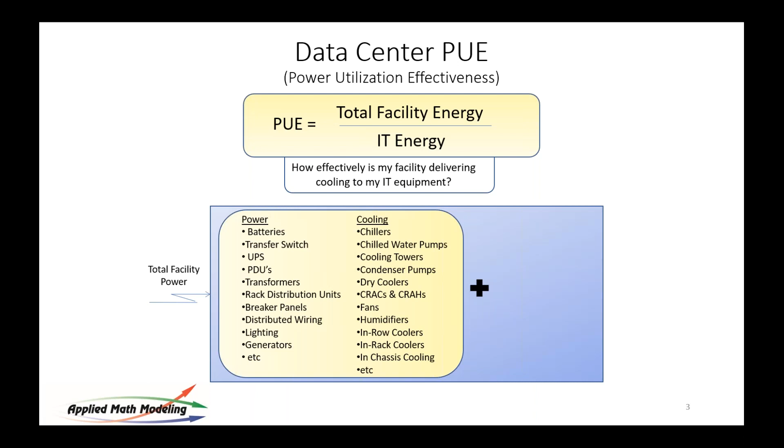Okay, so I want to do a level set first. The audience is fairly diverse here, so I'm going to back up and do a level set. PUE, I've done a lot of this before, I try not to be repetitive, so please bear with me. Power utilization effectiveness is total facility energy divided by IT energy. It was originally intended to represent how effectively the IT is being cooled, how effective the facility is at cooling that IT equipment. Total facility power is made up of all the power, including cooling plus IT. That's the numerator. The denominator is just IT power.

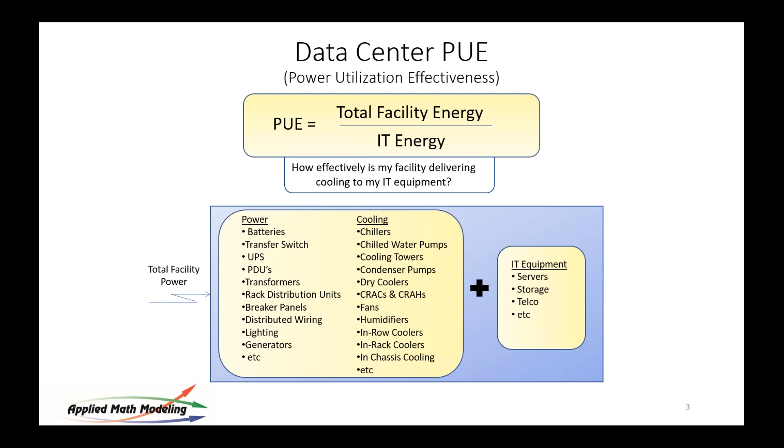But this particular metric has come under some criticism lately, and we think rightly so. Both Henry and I agree on this. PUE has some issues. For one, it's very difficult to measure, that is, the IT load itself doesn't stay constant, so trying to figure out what your IT load is difficult. You have to do this, by the way, for a whole year. PUE should be an annual number, not an instantaneous number.

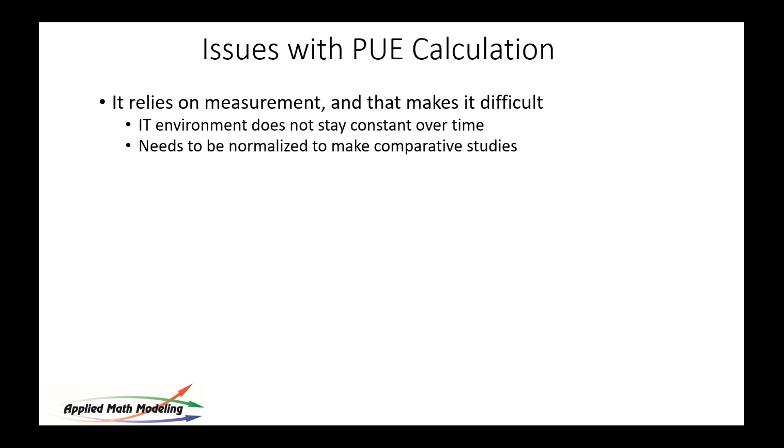Furthermore, it does not take into account environment. A data center in Alaska is not the same as a data center in Florida, even though they may be exactly the same with respect to mechanical load and everything else. The PUE number is going to be different. So why penalize the person in Florida for the person in Alaska? So that's part of it. It doesn't take into account environment, geography, as I mentioned.

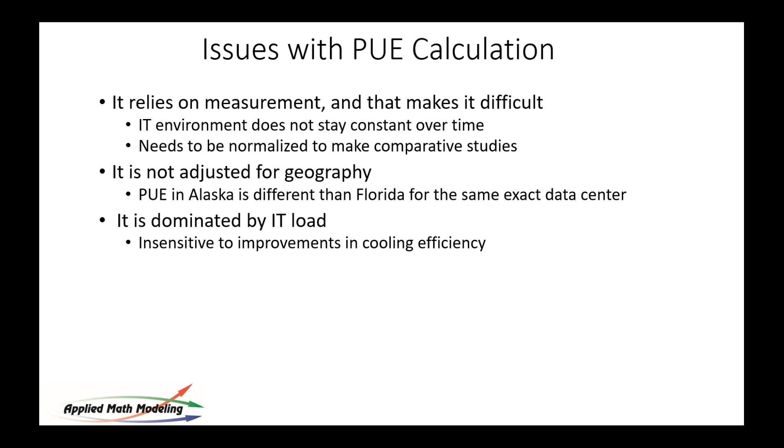It also is dominated by IT load. I mean, if your cooling system is very efficient, then this turns into a ratio of IT load to IT load, it's really dominated by that. So it's difficult to use it as a way to show improvements in cooling efficiency, and therefore it can be gamed. I think this is the biggest criticism of it.

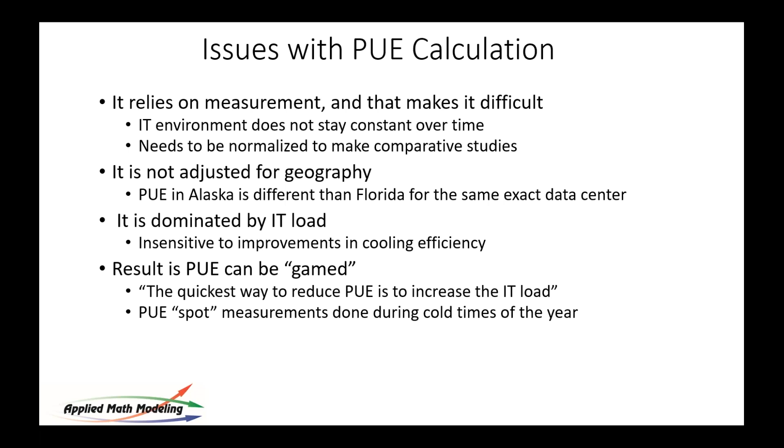I continue to go to these conferences and I hear people tell me that their PUE is 1.1, and I just scratch my head and think, what are we measuring? What does that mean? Where are we, is it Florida, is it in the North Pole? If it's the North Pole, just open the window, you've got a PUE of 1.0. So a lot of times these end up being spot measurements. There's no criteria really to it. The system for measuring it is poor. So it's not a great metric for indicating energy efficiency in a data center.

Now, ASHRAE has recognized this and been doing some work on this. And if you look at PUE, assuming your UPSs are efficient and everything else is efficient, which they're becoming more efficient, it really turns into cooling power. That's the dominant parameter in that numerator, cooling power.

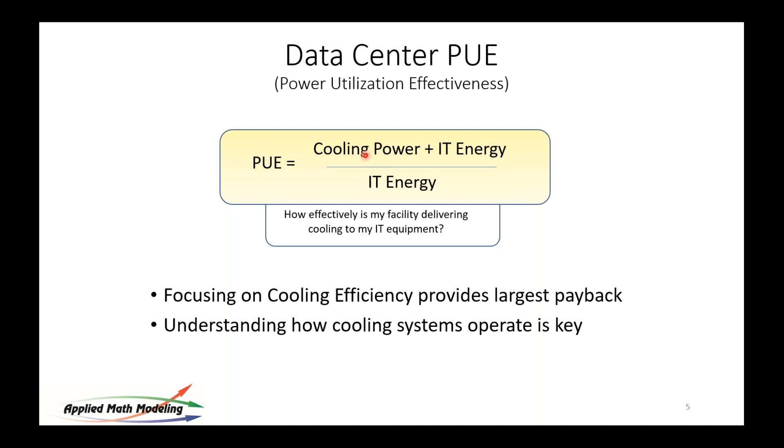And then you have IT energy and cooling energy. If you focus on the ratio of these two things, I've presented this in earlier webinars. That's exactly what ASHRAE 90.4 did. Now, they actually did an inverse of this - it's IT energy over cooling power, 1 over this. But nonetheless, it is a ratio of these two elements.

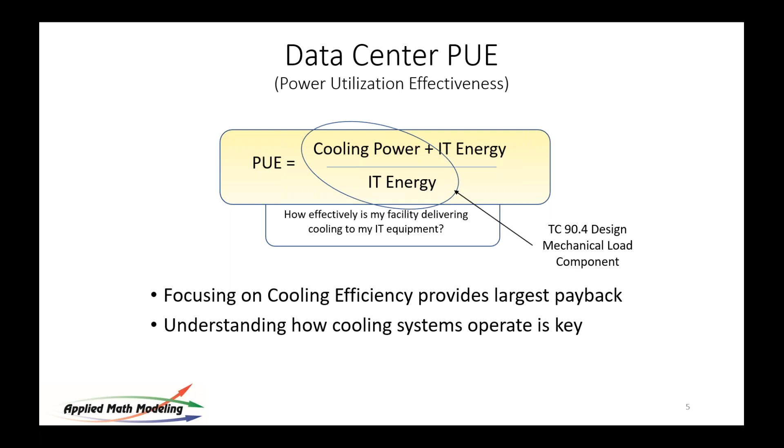And in 90.4, it's called a mechanical load component, and it is the ratio of these two parameters. This is very much like a chiller efficiency, which is typically measured in kilowatts per ton, a crazy series of numbers because they're not unitless. But it's the same idea, except for the entire system - the amount of energy we're using to cool the data center, including everything.

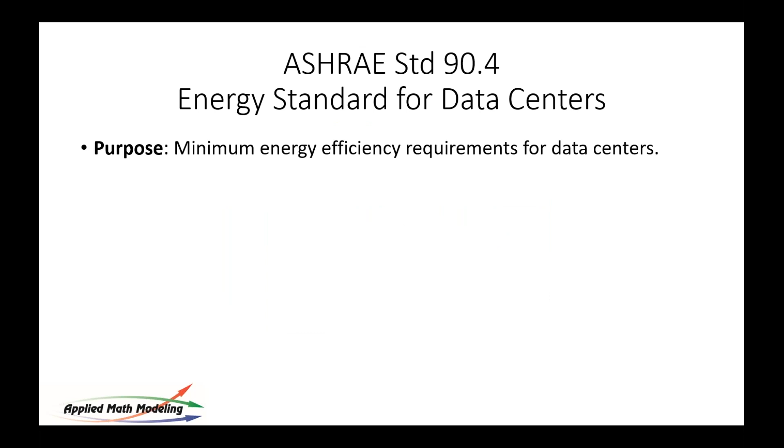So 90.4 is a minimum energy efficiency requirement for data centers. It applies to new data centers as well as existing data centers, and to modifications to data centers. It references 90.1 for all building envelope specifications. 90.4 was an extension to 90.1 because ASHRAE realized there were data centers in some of these buildings - how do you handle LEED certification on a building that's got a data center in it? That was the fundamental question.

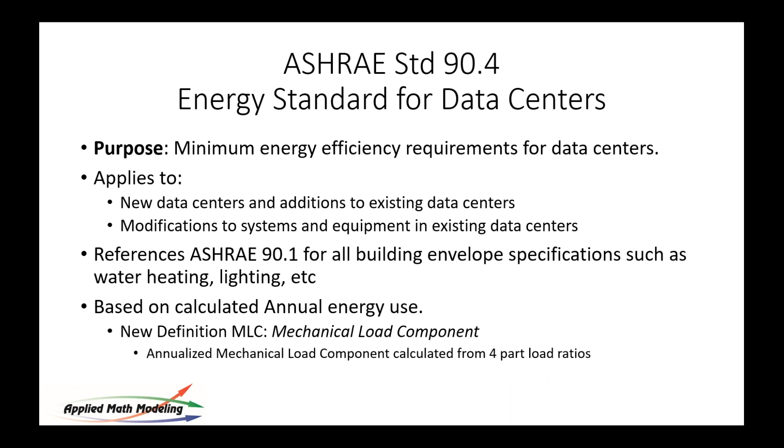It's based on annual use, and there's a new definition in 90.4 called mechanical load component. It's an annualized component calculated, in the most recent spec, in 4 sections based on 19 climate zones. It also has specific ITE criteria - that's the IT side - and they use 4 points.

They use mechanical power divided by IT power, effectively, at 4 different points. So this is really an inverse of COP - it's a COP number upside down. But the point is it's ratioing the mechanical power to cool compared to what it's trying to cool, the IT power, at 4 points.

The reason for the 4 points is to understand how that cooling system behaves at low IT loads. This is something that often happens: you design the cooling system for a data center to match worst case conditions, and then you never load it to worst case conditions, so it never runs right. The cooling efficiency is never high because everything is way off its design specification.

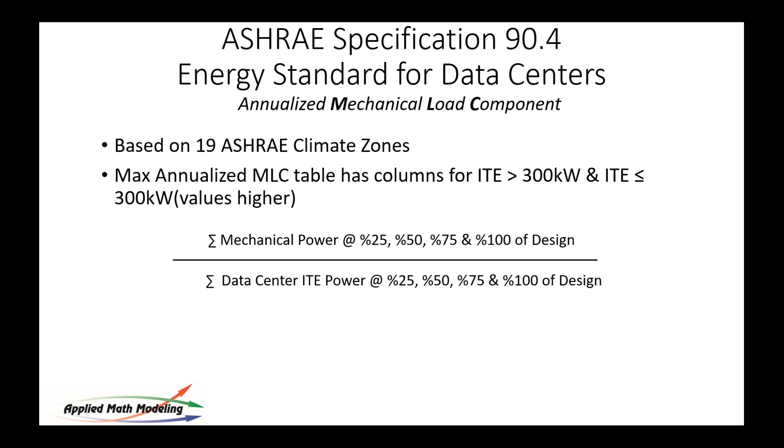So this was an attempt to put some better fundamentals and better metrics in place. Here the mechanical power is the sum of everything - it's really a systems level coefficient of performance kind of ratio. It includes cooling pumps, heat rejection fans, air handlers, etc. We think this makes a lot of sense, and now there's criteria that you can meet. It ends up being essentially the inverse of COP for the entire data center operation, which is a good thing.

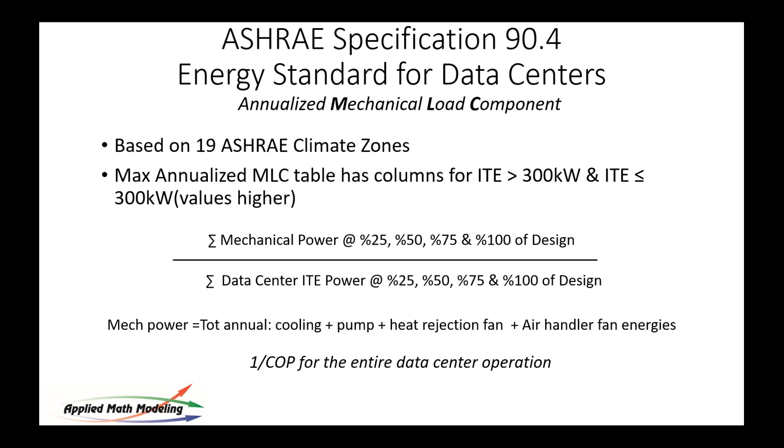So an opportunity for energy modeling now becomes apparent. Now that we have a standard specification set for this, the opportunity to create an energy model for the entire data center exists. This is something I've wanted to do for quite some time. We've added, as you probably know if you're a CoolSim user, energy metrics, but up until this point you had to do hand calcs to do it. But now that we have this, you can do modeling.

You can actually model the cooling system and measure its performance against the criteria set by ASHRAE, geographically based on climate zone. And you can develop system level models for each of the components, which is what we've been working on. Efficiency adjustments for things like fans, chillers, pumps, cooling towers - all of these have an empirical curve of energy efficiency that is a function of load.

The analogy I'll use here is your automobile. The engine runs most efficiently at a certain RPM. The transmission is a way to get you to that RPM - that's why they have a transmission. It doesn't work well at low RPM or high RPM; it's made for something right in the middle. You'll even notice automobiles today are getting more gears, now up to 8, trying to keep that RPM constant. Same case here - whenever you move off the design center of a fan, chiller, pump, or cooling tower, energy efficiency will drop.

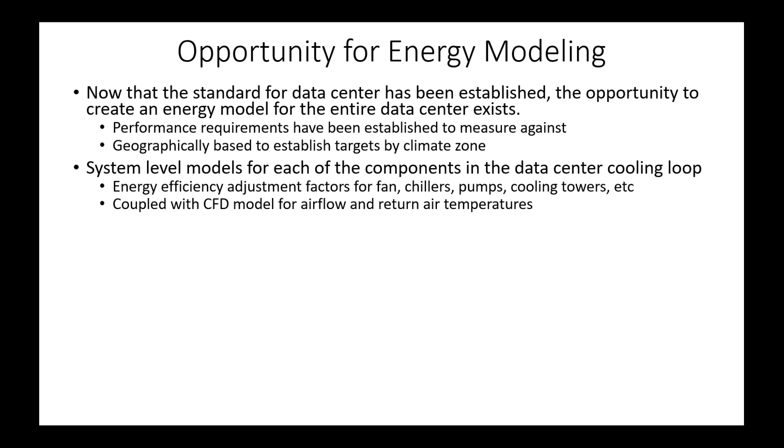Here, what we're doing is taking CFD output from CoolSim and feeding it to the energy model so that we have a coupled system that allows you to model the entire environment. This gives you a full tool for understanding how to improve the energy efficiency of the whole environment.

It'll even allow you to do things like change the location of the data center. What if we were to take a given data center and put it in Oregon versus Florida? Should we use an evaporative system versus an air-cooled chiller? These kinds of decisions can now be calculated, can now be modeled.

Things like changes in control strategies can be modeled. What if scenarios—what if I lose something? What if a chiller goes down? What if the second data center or the room that I'm putting on this plant is not going to come up for a period of time?

This helps you in the decision-making process because it allows you to understand the implications of those things. And also, I think this is going to become rather important: compliance. Is it compliant to 90.4? We see LEED certified becoming a fairly well-recognized moniker that people are encouraged to pursue.

We think this will be the same way. 90.4 will become something that data centers need to adhere to with respect to efficiency. And really the best way to know whether you've done that or not is to build a model of it and see if it does.

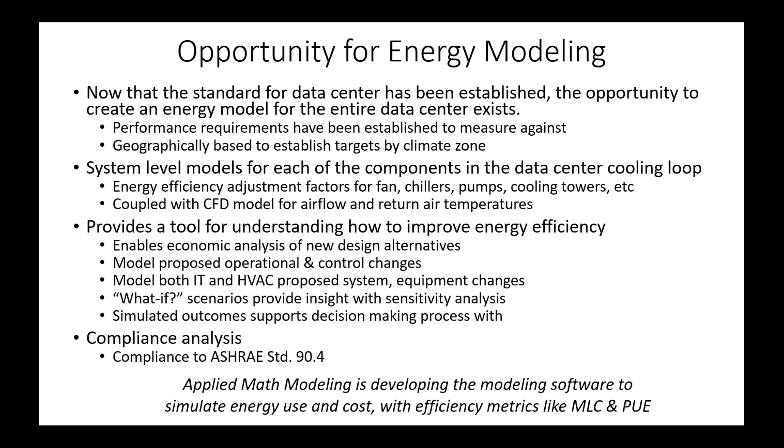So we're developing this modeling. Henry has certainly led this effort, been a big part of what we're doing here, and we will include these metrics in the output of the software. So what we're going to do today is walk through an example of how you would use this and how it ends up looking, and I'll show you some of the early work we're doing with the output coming out of the system.

The first thing we'll do—I've done this in many other webinars, so I'm not going to do it all here, I'm trying not to be redundant. If any of you want more details about how to do some of these things, just send me a note and I'll refer you back. I have recordings of all the webinars we've done in the past on our website, and this one will be recorded as well if you want to go over it again.

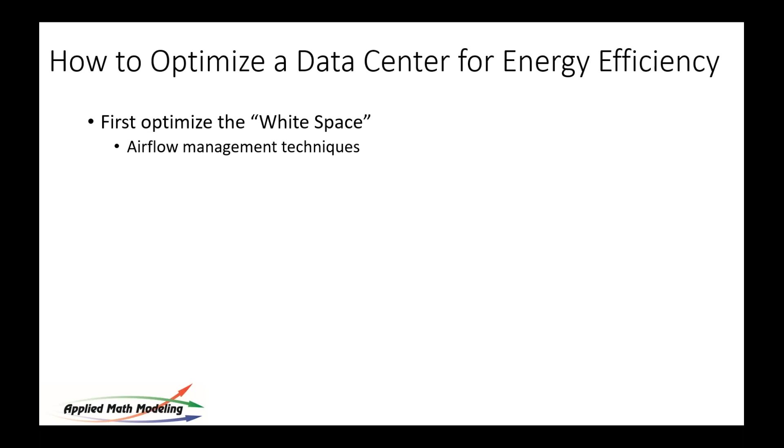So the first thing we need to do is optimize white space. This is generally airflow management techniques inside the data center itself. Then we optimize the mechanical system. We're not going to do a lot of this today in the interest of time, but there's a lot of opportunity. What Henry and I are finding as we go through examples is that the opportunity to optimize the mechanical system is fairly dominant. Right, Henry? We're seeing the mechanical side efficiencies can save a lot of money.

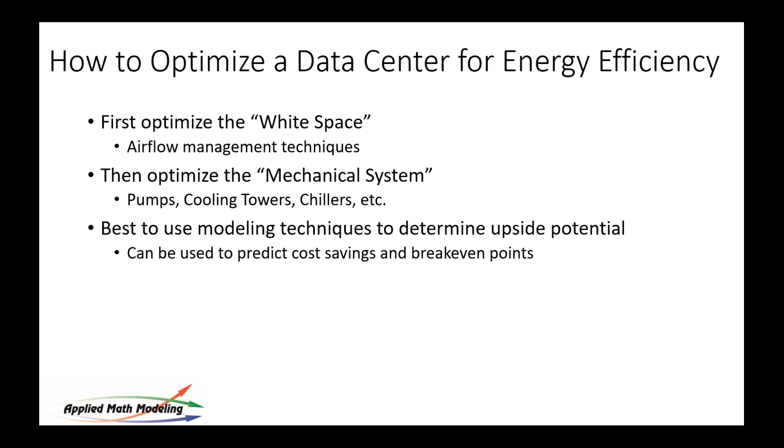So things like pumps, coolers, chillers—we use modeling techniques to determine what the upside potential is. For example, what's the simple break-even? What's the crossover point before you earn your money back? That's usually the one that drives it, although carbon reduction is becoming a big deal too. How much carbon can we reduce from doing these things? And we can predict that quite accurately.

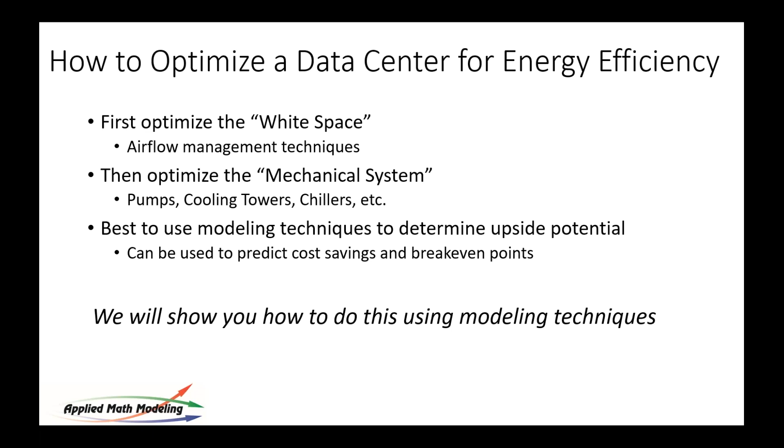So we're going to show you how to do this today with a very simple example. Again, today what we're trying to illustrate to you is primarily methodology—just show you what the sequence would be. Again, this has been reviewed earlier, so I don't want to belabor it.

First step is model the existing conditions with a baseline. Step 2, drop the total air supply by the air handlers to match the demands of the racks. For those of you who have been through DCEP training, this should be very natural to you. DCEP is data center energy practitioner training delivered by the Department of Energy.

This should be very obvious to you. I'm going to use terms like RTI—RTI is the return temperature index. It's a ratio of the amount of air the racks need compared to the air handler delivery. The air handler delivery flow is usually too high in most data centers I visit, so this number will be lower than 100 because rack demand is in the numerator.

And so VFDs are popular to try to get that closer to 100. The next step you do is to drive the supply air temperature up as high as possible until the RCI high, which is the metric.

Again, I'm referring back to DCEP training. RCI is the rack cooling index, and it is hot spots on the rack inlets. The TC 9.9 thermal guidelines suggest you shouldn't be higher than 80.6 Fahrenheit on rack inlet. RCI just calculates how many of those areas you have.

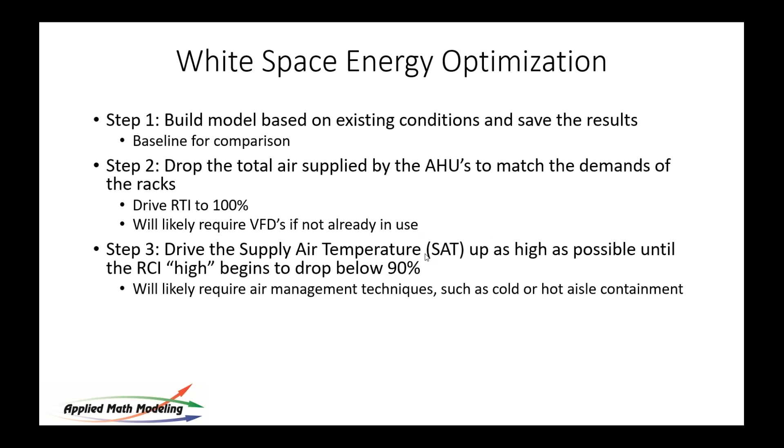You want it to be in the high 90s if you can get it there. A few hotspots don't matter because you don't put equipment everywhere in the rack, but you certainly want it to be above 90. Typically it takes some air management techniques to get you there. And that's it, that's what you do.

That's the optimization routine, and we've done that before in earlier webinars. So today we're going to use two arbitrary rooms that I picked from a pile of models that I've had over the years, pretty common ones. These are chilled water, using a simple air-cooled chiller for these two rooms. The room on the left is 6,000 square foot, got 31 racks, about 623 kW.

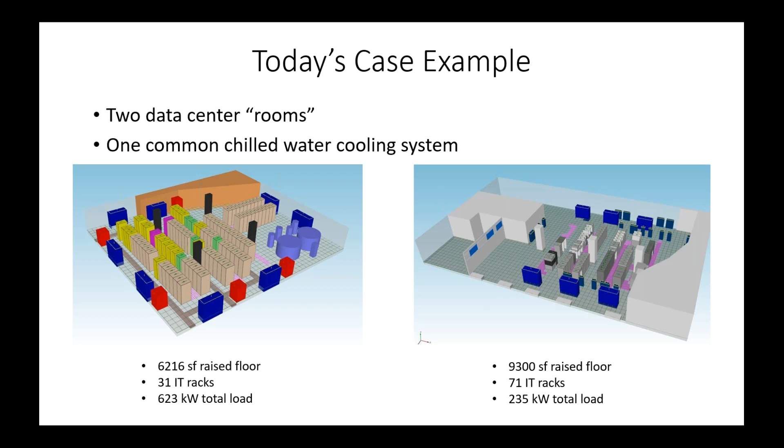Over here on the right, this one is a little bit funky. You'll recognize this because it's got crazy walls and partially filled cabinets. This one's a little under 10,000 square feet, 71 racks, 235 kW. So we're looking at a total here of about 858, a little under a megawatt of power going into these rooms.

There's a couple things about this data center that are a mess. This is a 3D representation of the air coming out of the tiles, what comes out of the CFD modeler. And you see an awful lot of recirculation going on right here. The air is coming up and back into the heat exchangers. This is a bad thing because we're cooling off those returns.

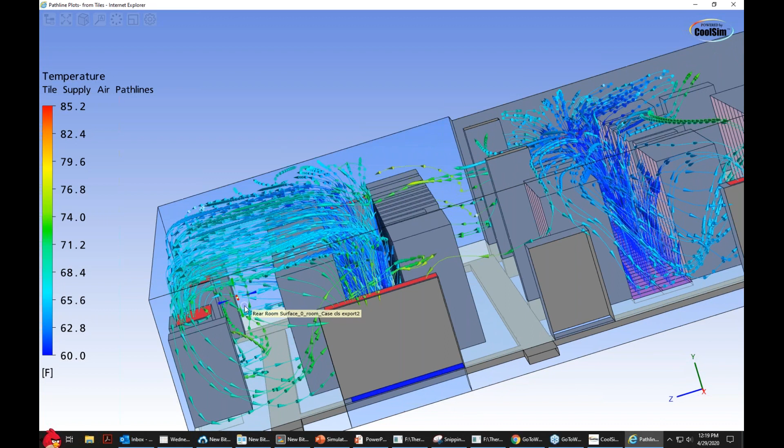You shouldn't see those at all here. This is only supply air. Only the air coming out of these perforated tiles is what should be seen. It should come up and stop right in front of the rack, and it doesn't. It comes up and blows by. There's too much of it.

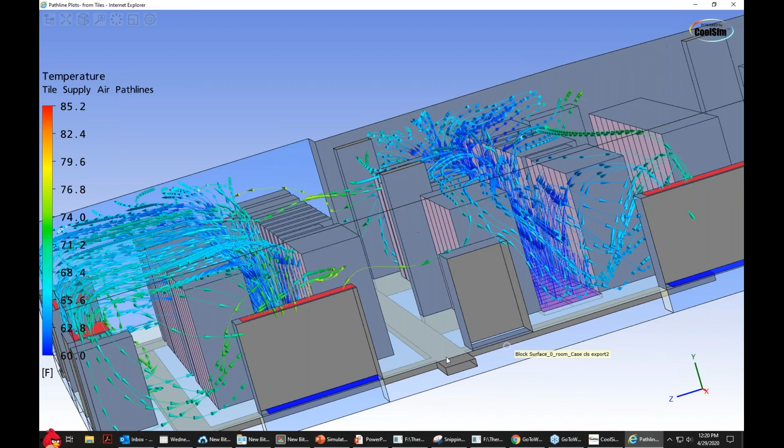And you see the temperatures dropping here as we get to the return. So it's cooling—it's actually increasing, right? This cold air is being warmed by the room, really by the output of these racks here. Furthermore, we've got problems over here. We're a little too close.

In CoolSim, you have this nice ability to remove some of the surfaces so you can see. I'm just going to turn off my racks here so you can see what's going on behind. And you see right there the Bernoulli effect happening—very high-speed air coming down under the floor, coming along from that CRAC unit and bending. So these racks are starving at the top for cool air because the air, due to momentum, is going that way.

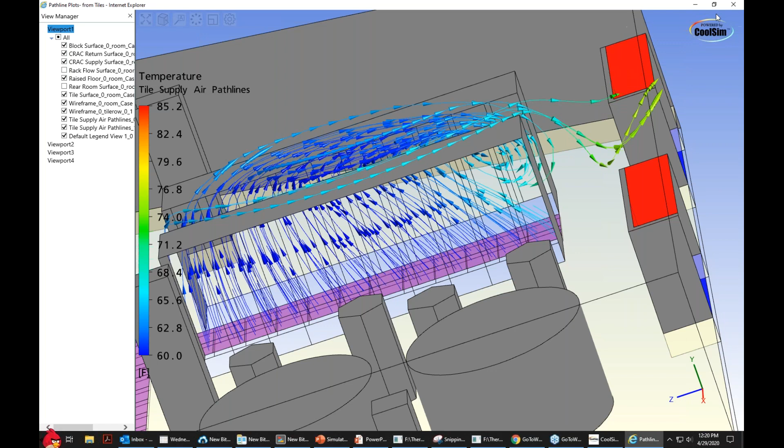So that's a good illustration of putting your racks too close to your cooling units. There's a bunch of these plots. I thought I'd show you at least that one to show you what's going on with this particular design. Not a good design, but not unusual—it's not unusual that I go into data centers and see things set up that way.

The next one is equally problematic. It's probably grown over time. The racks have holes in them, and I won't show you that in the interest of time, but it's a similar thing here—you've got air going everywhere. The RTI here is 50%.

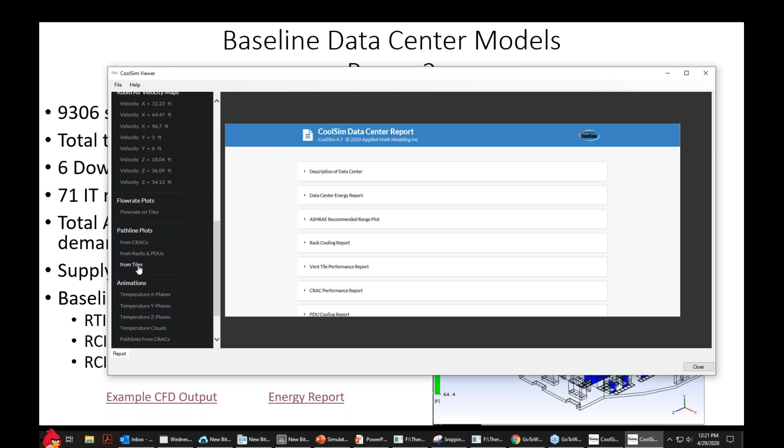So let me show you the same plot just very quickly. This is the plot of air coming out of the tiles—same problem, air going everywhere. So this is kind of a mess. You can always tell, and remember, that it's not supposed to be doing that. You're not supposed to see these path lines go anywhere but straight in.

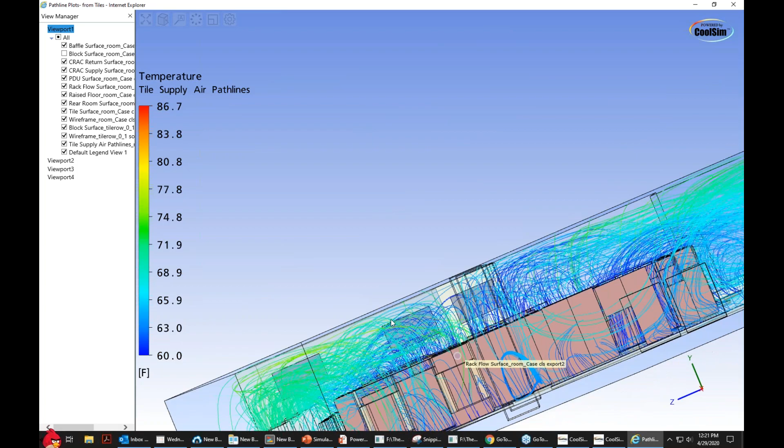This one's also unblanked, if you notice. Let's turn off that block so we can see through the wall there. But you see there's holes in those racks—they didn't blank. So that's also a problem. So that one's got way too much air and it's not in great shape either.

Now what we've added to this is the ability to see the energy report. Here's an energy report that we're building—it popped up on my other display. And now we have energy. We did this run for Boston Logan, which probably isn't the great place to do an air-cooled chiller, I noticed, Henry. And then we do performance for the plant. So here is energy for the overall use: kilowatt hours, monthly averages, average hourly PUE, average COP, MLC, and annual cost to operate. It's costing about $110,000 to operate.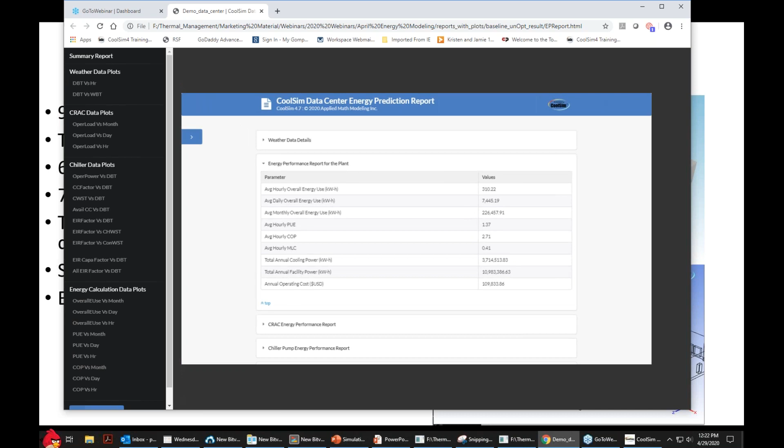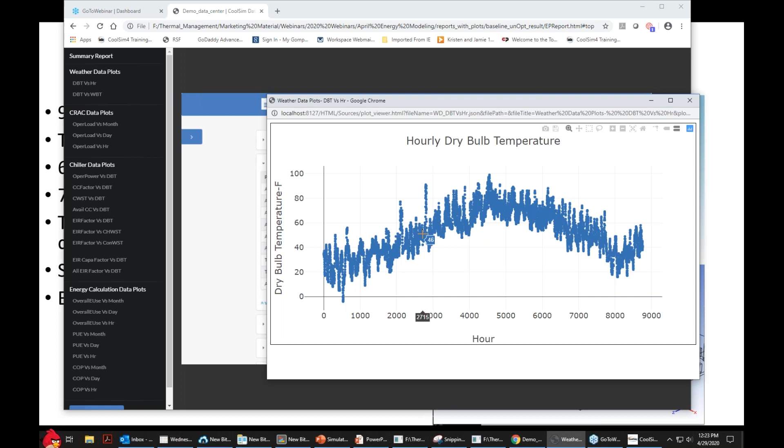Over here are all of a various set of plots—for example, dry bulb as a function of time. So there's the entire year. Here we're doing calculations for every hour of the year. For each hour, we calculate the energy consumed by the cooling system. We do that by summing all of the energy loads and the cooling loads. We do cooling calculations, and cooling capacity readjustments based on return and supply temperatures and other parameters.

Henry, are there any of these here that you'd like to point out, specifically on any of these plots, that I can bring up just to illustrate them?

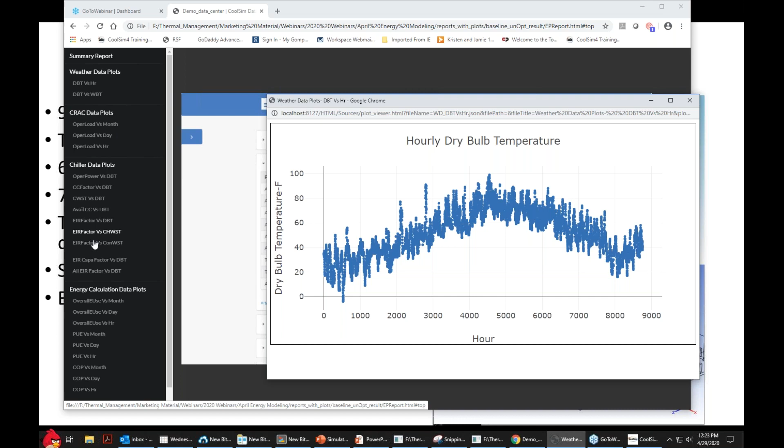For example, we have power versus dry bulb, energy calculations, overall utilization by month. So here's energy utilization by month.

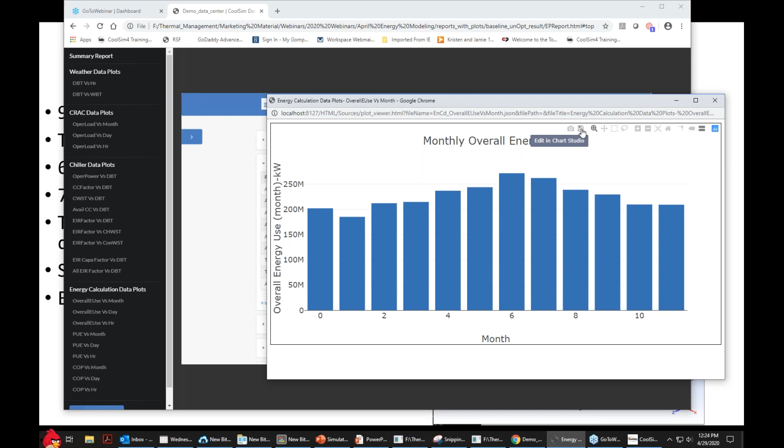These plots are very nice because you can just scroll over them and they'll give you data. You can also export these plots, download them as a PNG, or export them into another program to do work with. And we've put a whole bunch of them in here.

This is PUE by month, overall efficiency energy. Here's PUE. Now again, here you can see the PUE values don't change all that much, because the PUE is fairly insensitive to that.

So Henry, is your mic not open or can you not hear me? We seem to have lost Henry.

There is a question that came in: from what source do you derive the weather data? The weather data, I believe, is TMY data that we procured. It represents all of the ASHRAE representations we need. So we've got, I believe that's what you call it.

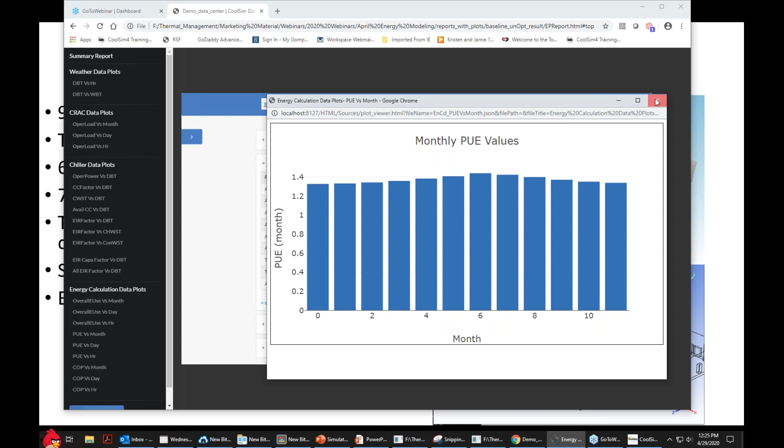Okay, so we have all these plots, and also this will all be part of the output report. Chiller pump efficiency here, performance of the pumps, their rated power, part load ratios, the CRACs. Here is energy performance of each of these. They're labeled CRAC, but it's really an air handler because this is a fan coil in the room.

And so all of the data that you could possibly need. Here's chiller efficiency. This is adjustment factor. Every piece of this equipment, as I mentioned, has a curve. And you look at things like part load ratio, how is it being loaded, and then you adjust for it.

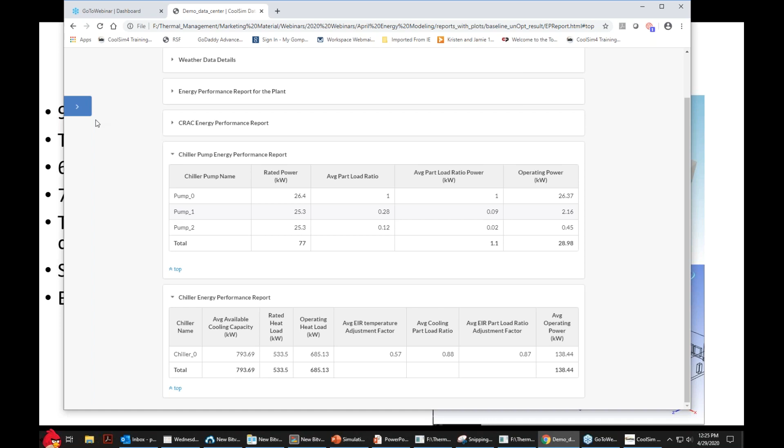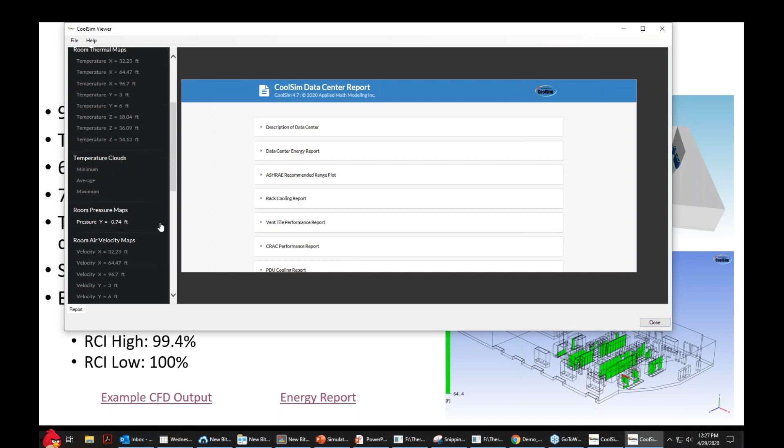It's got some side breathing pieces of equipment over here on the right that you'll see are causing some issues. So let's just take a look at the path lines from racks. I think you can see it there.

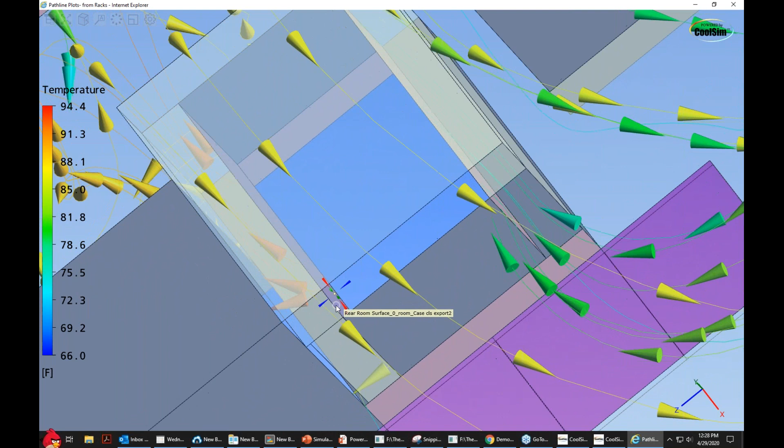So these are path lines of air coming out of equipment, and you can see over in this range we got some side breathers here. You see these are side to side, very hard to manage from a containment point of view because they don't breathe normally. You see air is coming out of the back of these devices and from side to side. This is communication equipment, often like this.

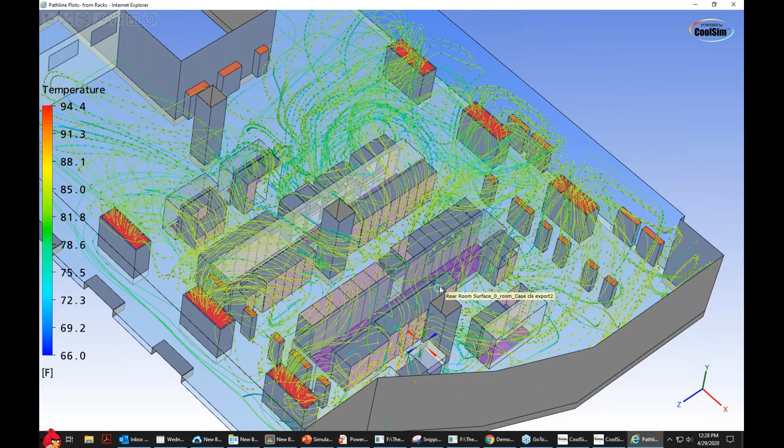So I was not able to contain this section, and that's where you're seeing some of the hot spots. But again, as long as you know that, the issue of containment is sort of one of knowing where your hotspots are going to be and managing them. And so that's how you handle that one.

RTI 93, RCI high 90s, 99, and you can see over here that problem occurring on those side to sides.

Henry, did your mic come back in? I thought so. No, I didn't mute you, Henry. You should be able to hear you. Don't know, we got a few technical difficulties today.

So let me take a look at total energy consumption before and after we did this case. In this one, we are operating at a base case of average hourly at 310, optimized case 248. Overall monthly use, we went from a base case of 226 to 181.

Take a look at the PUE. PUE didn't change that much, 137, we got it to 130. So changed a little bit, but look at the average COP numbers and the MLC numbers.

Changed quite a bit, we went 271 to 339. That's one of the reasons why these metrics are better, because we're seeing more of a focus on the mechanical system itself and the ability to get better sensitivity out of that.

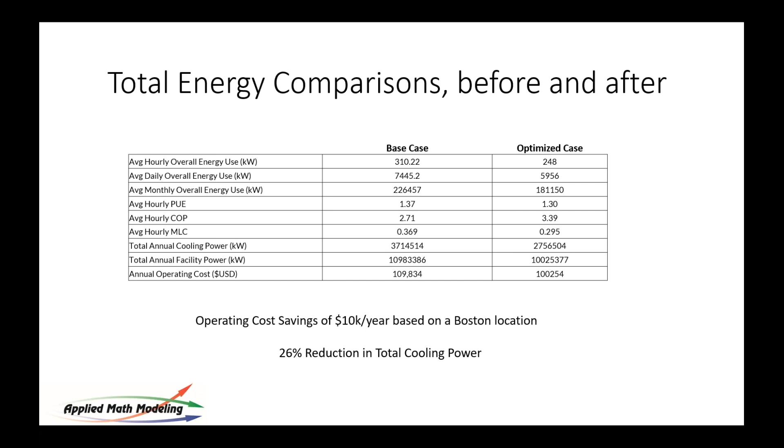But when these things are broken out, like a project we did recently where we had a separate chiller, a cooling tower, and a plate and frame heat exchanger, the opportunity for energy savings was higher because you could get inside the box and make changes to specific components that allowed for optimization.

We gained a lot just from things like adding VFDs. So this kind of modeling allows you to do things like ROI. What did it cost to do those improvements I just made? Now I did cold aisle containment - how much does that cost? I don't know exactly because I'm not in that business, but it's easy to find out. You get quotes, but at least now you know what the return is and how long it will take. At $10,000 a year, chances are you could return it in a few years, which is usually within the scope of reasonable for energy projects.

It's also the only way to know the total energy consumption prior to your build. Furthermore, the new ASHRAE spec is going to ask us as designers to look at that at 4 different points: what's it look like at 25, what's it look like at 50, 75, and 100 - not just 100. The historical method we've used is build for worst case loads.

And what we found in the data center business is we're not seeing worst case loads. That's because the energy efficiency of the IT equipment itself has gotten better over time - they're running at lower voltages, using less power. Now that will eventually catch up and we'll get back on that same curve of increase again. But for now, I would argue we probably have more cooling capacity than we need in many data centers.

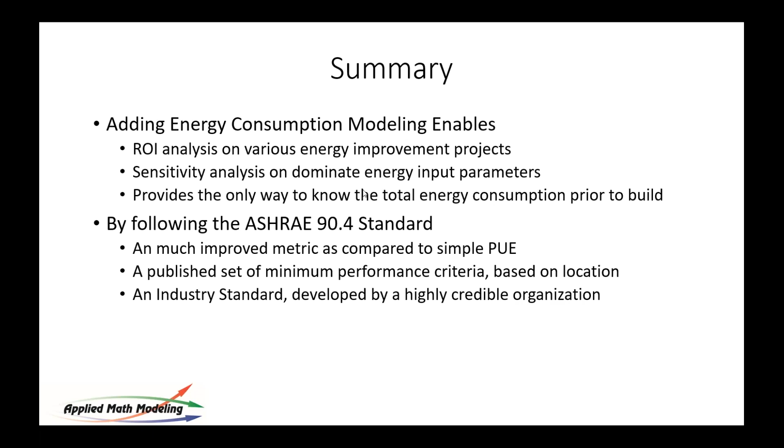Question here also coming in, let me just finish these up. This relates to this slide here. We can do modeling services, and we did an announcement earlier in the year. It was supposed to be at Data Center World, but of course that got canceled due to our current health situation. But we as an organization can do servicing and custom energy modeling services.

Henry has a lot of experience in this field. He was doing energy modeling long before he went into the data center business. He's also a member of TC 9.9, as am I. He's also on the mechanical subcommittee of 90.4 and is leading the effort to put this all into mathematics.

So the question came in: does this exist in CoolSim now? No, we're building it in, and there will be a release this year with some capability in it, but it won't be comprehensive. However, in the meantime, we have the code already done, and we can model it for you as a service. We just don't have the GUIs done and all the interface done and the reporting done.

I showed you some of the reporting earlier, and I may go back to that now that we have Henry. He may want to walk through that reporting a little bit more.

We've got most of it done for at least some basic functions like air-cooled chillers and a few other things, but there are many variations of mechanical cooling systems. By the way, I say many, but the quantity of variations is really not that large a number. However, you need a way to capture them all and to get performance data for each of the components so that you can create the curves for them.

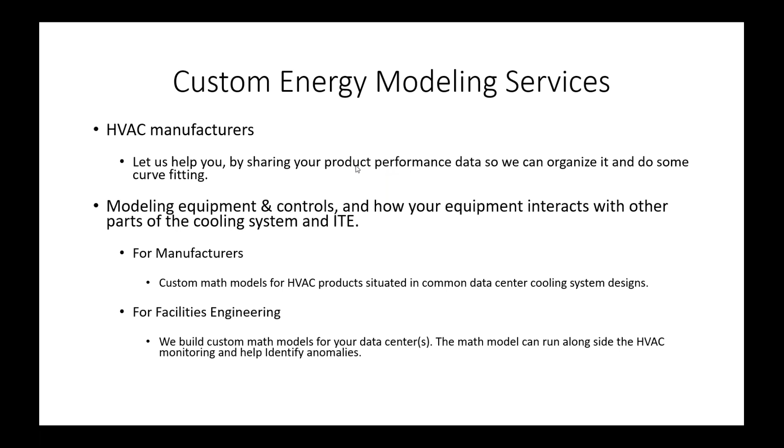I am, however, going to, now that you're back, go back to this energy report here, Henry, because it's new and interesting. This is a new report. For those of you who are CoolSim users, this looks very much like our existing report that we have for output, but it's got energy in it - more energy.

Before we just had a very small entry here and not much, but now over here we have all these plots. Are there any here that you'd like to just spend a moment on, Henry, and walk through? Go up one, that one there. Yep, okay, let me see if this is working.

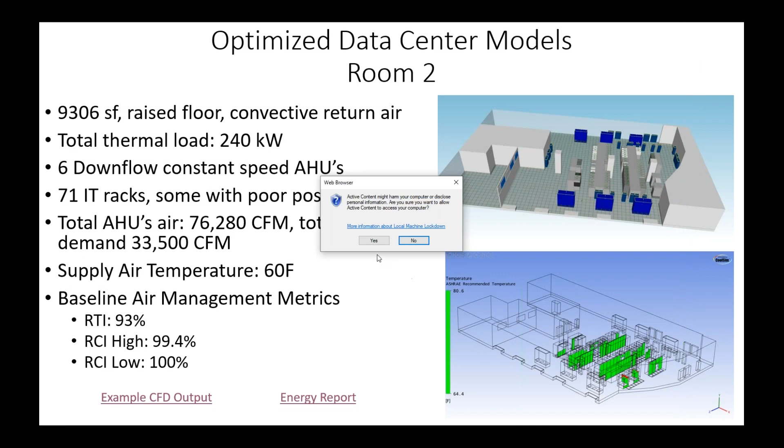Something as a function of dry bulb temperature, so that we could show - let me try this again. This was working earlier. Oh, so maybe that was it. I need active content.

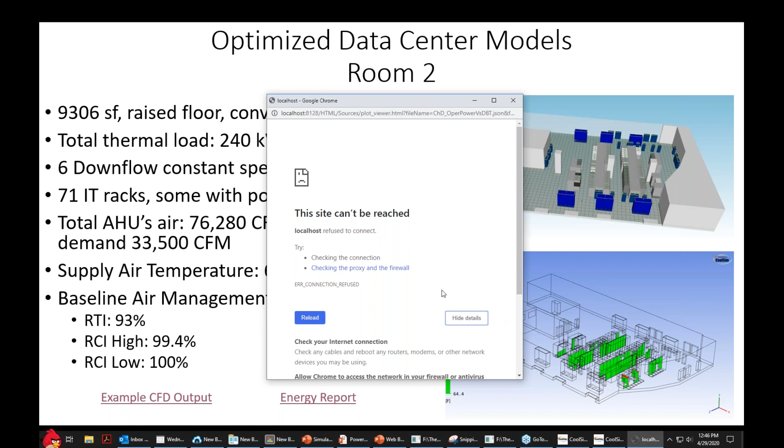Let me go forward. This was working. Of course, when you were off the phone, this was working, and now that you're back, it's not. So let me just go back here and try this one.

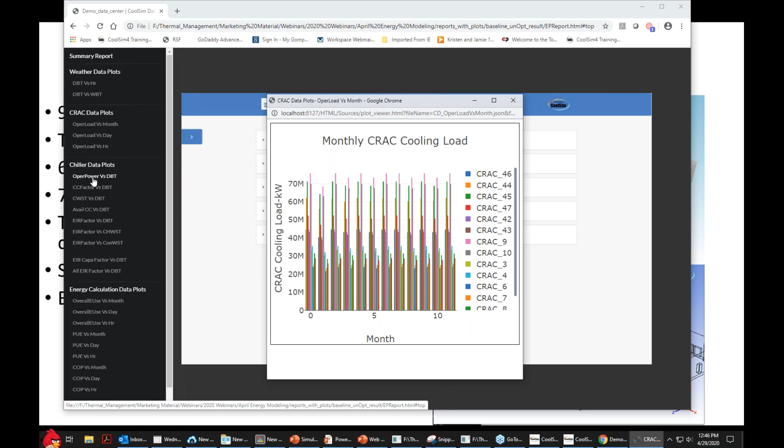There we go. So that's operating load versus month. You wanted to look at operating power versus dry bulb.

So this is an example of how the chiller's operating power varies as a function of the outdoor dry bulb, and there's 8,760 points plotted on this XY plot. The operating power has several functions or adjustments made as a function of outdoor dry bulb. The capacity of the chiller is adjusted as a function of outdoor dry bulb, as well as the power of the chiller. And the part load ratio varies as a function of outdoor temperature as well. So those are all combined in the graph that we see here, which shows that the chiller takes more power as it gets hotter out.

Yep, the curve is something that's natural, and when you think about it, chillers are going to work harder at hotter dry bulb temperatures.

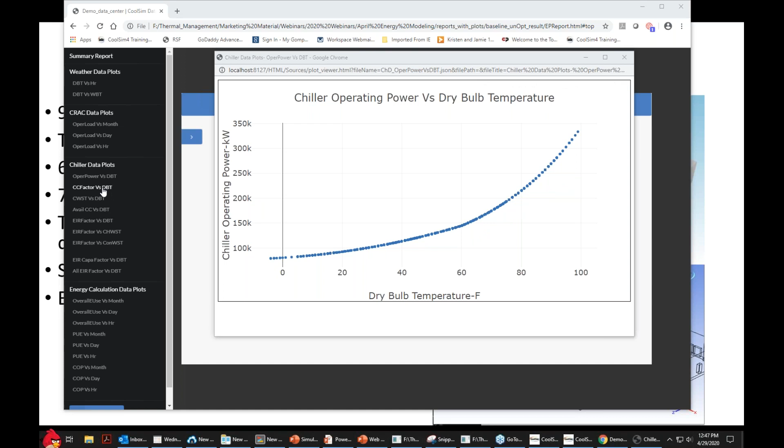Now, there's also here a cooling capacity factor. This is kind of an interesting plot here too. Do you want to spend a minute on this one? Yes, so in this case the capacity is varying as a function of the dry bulb temperature. That's the outdoor dry bulb temperature, and I'm not quite sure what this graph is actually.

Well, you've got chiller cooling capacity factor on the left. That's a ratio. It's generally correct. I don't know about the bend in that curve, but the chiller capacity is highest at lower temperatures. Yep, except that there's a minimum unloading capacity that takes place below a certain point. And then as the temperature goes up, the capacity of the chiller goes down. The chiller capacity is 1 at 95 degrees, which is the rating condition for chillers, and above that it goes below 1.

We did have another question that came in about where we got our weather data. The weather data is typical meteorological year data, TMY3 data, that we had processed to just extract the dry bulb, wet bulb, and humidity ratio characteristics of the outdoor air.

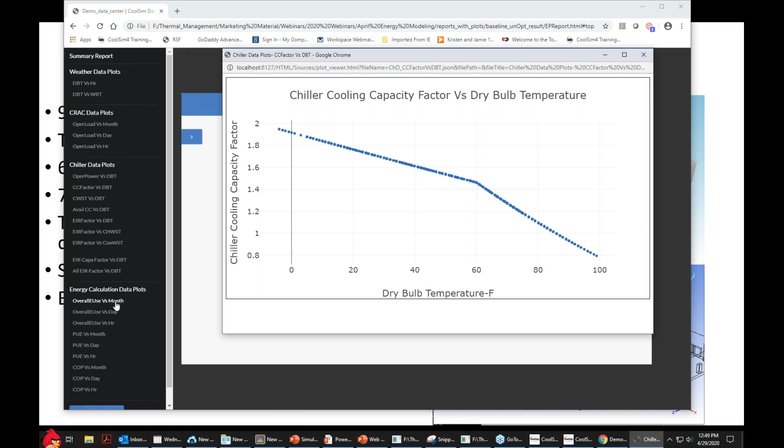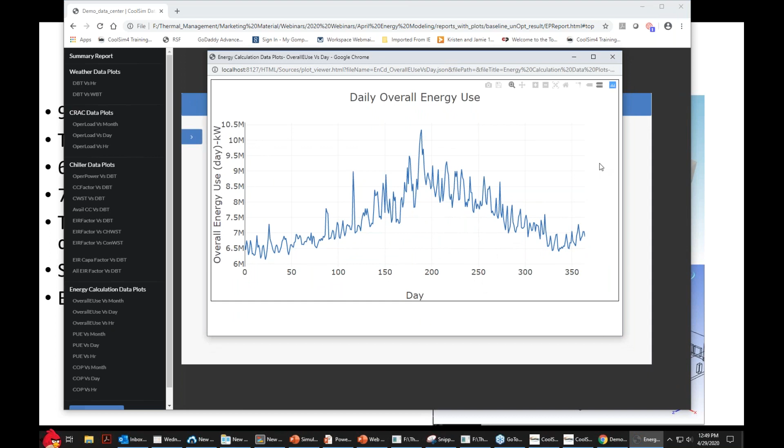Down here we have use per month, so this is monthly usage. I was going to look at daily usage as well, daily energy usage, days in the year. Yeah, it's actually interesting to look at

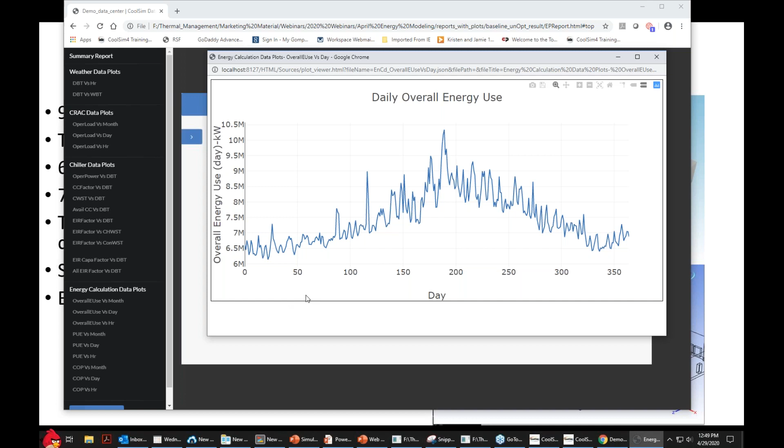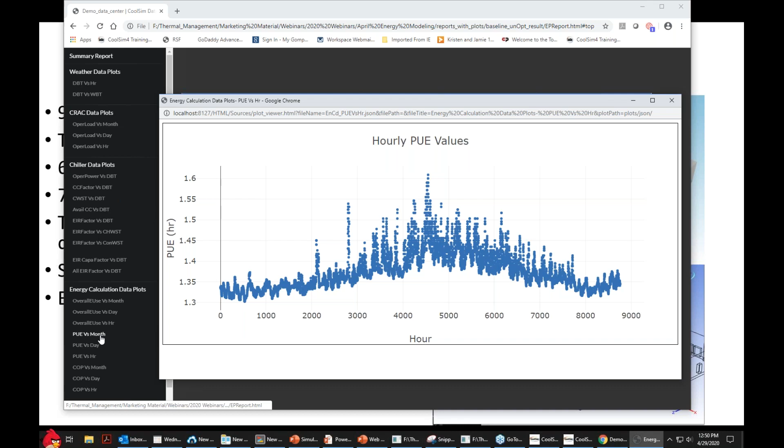PUE and how just the difference in granularity affects the variation in PUE. So a monthly PUE is going to be almost constant, where an hourly PUE is going to have a lot more variation in it. This is part of the issue with PUE that you and I have talked about, and I pointed out early on, is that PUE needs to be measured over a period of time, and you can see why. Now if you go to the monthly, you'll see that this is 1.6. Yeah, monthly, it doesn't get up to 1.6. There's very little variation when you average it on a month-by-month basis. The variation exists within the hours or the days.

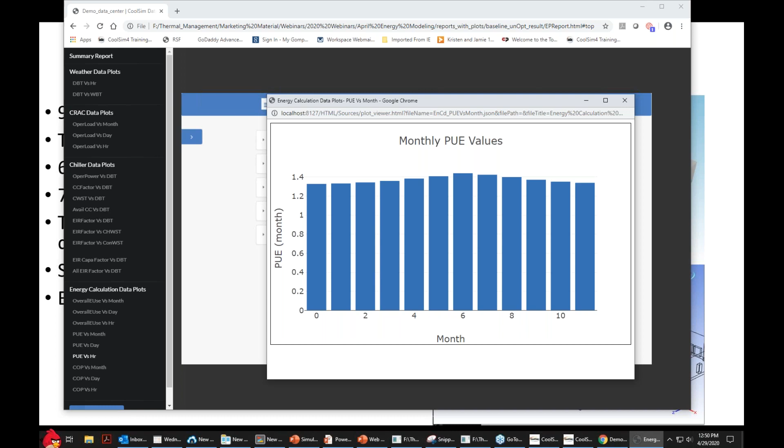So we had a question about does chilling occur for water or for air? That was an air-cooled chiller, I believe, that we were looking at there. Yeah, in the models that we developed, we have air chillers and water chillers. And in the case of each one, we have different types of compressors. So for an air-cooled chiller, there will be a scroll, a screw, and a reciprocating. And for a water-cooled chiller, there'd be those plus a centrifugal chiller as well. So the correlations take into account whether it's air or water, and also what type of compressor is being used in the chiller.

One of the questions coming in here, Henry, for you is on the mechanical side, we used a primary secondary pumping system, and the question becomes, do you see variable primary flows? Do you see VFDs being used on the primary side in data centers?

Well, I think that they can be used, but you have to maintain a minimum flow to make sure that the chillers will operate efficiently. But the minimum flow gives lots of room for variable speed pumping to have savings versus constant speed pumping for the primary loop. But you'd have to maintain a minimum flow. It can be considerable, as well as what we've found, right? Yep.

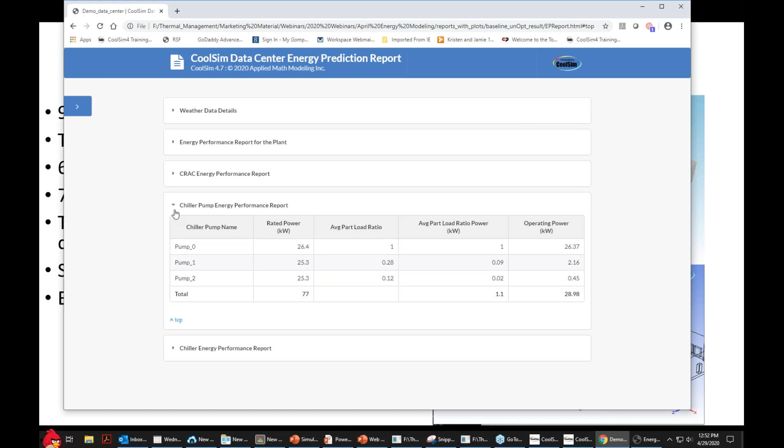Higher chiller efficiencies, this is another question coming in, we're seeing higher chiller efficiencies. And so the general question to you is, do you see a need for cooling towers and plate frame heat exchangers anymore? Or are we all headed towards things like air-cooled chillers like the one we're seeing?

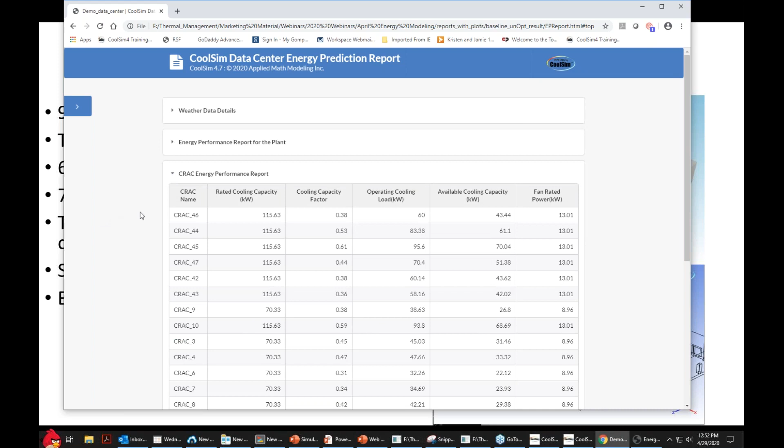Yeah, that's a very interesting question. There has been a lot of change, and there is a lot more maintenance associated with cooling towers. The evaporative power of water, though, is a strong factor if you have an adequate supply of water, so overall the efficiency can be higher. But as time goes on, the difference between those two seems to be getting lower and lower, with cold temperature, high efficiency cold temperature heat pumps, for example.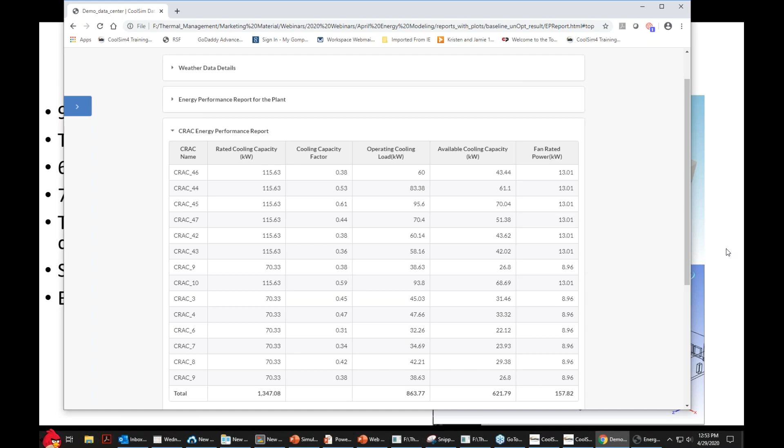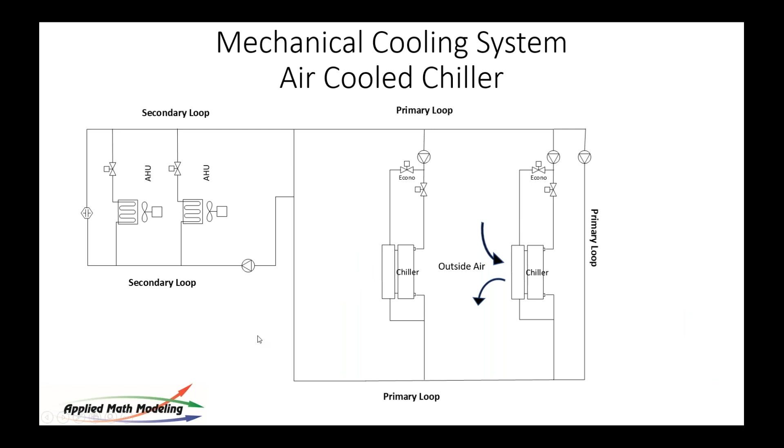Okay, so I think that pretty much summarizes it for today. I wanted to just go back and make sure that if there are any questions, they have been answered. So I'll just go back to my summary here, if I can get my computer to respond. There it goes.

We'd like to invite you to reach out to us if you're interested in having us do any of this kind of work for you. There's been a couple of questions about when we can get this capability inside the software. That's underway, ongoing. You should be able to see prototype versions of this popping out fairly soon. It's been difficult doing development lately, as you can imagine, for us all, but we're continuing to do it.

Most of this work has been wrapped up, at least in a limited form of capability. Air-cooled chillers will come first. Those are fairly simple, but we already have the mathematics laid out for the rest of it. It's just an issue of getting it in there. In the meantime, we can do it for you, we're willing to do it for you. As I mentioned, the mathematics has been laid out. It works, we just haven't been able to get it into CoolSim itself.

So as a service, we are more than willing to help anyone in our audience, including HVAC manufacturers who may want us to do some work for them in terms of modeling their components, or HVAC manufacturers that would like to work with us to make sure their products are represented correctly in our models. We generally use, as Henry pointed out, algorithms coming from other sources, Department of Energy, for example, EnergyPlus, DOE-2, places like that. We work with the national laboratories, we know them, and we work with them on approaches to these solutions and try to pick the best ones that meet it. But again, it's empirical, and it's up to the equipment itself in terms of its behavior, so mapping its behavior can best be done with the cooperation of the manufacturer.